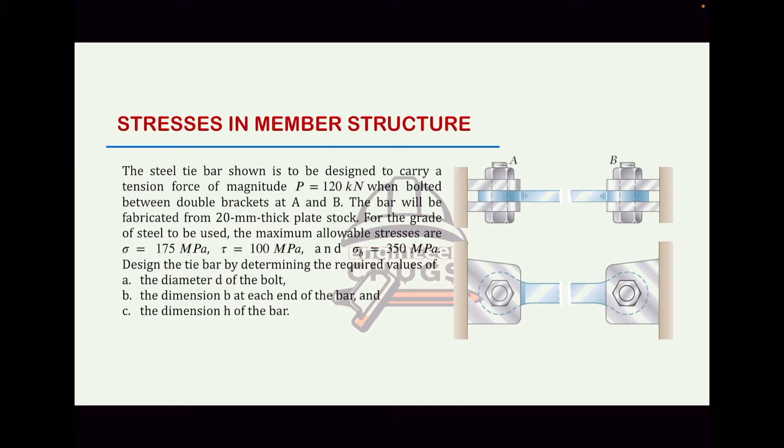Okay, so we have here an example. The steel tie bar shown is to be designed to carry a tension force. So ano ba yung tie bar na yan? So yung tie bar is ito. Itong blue. That is a tie bar.

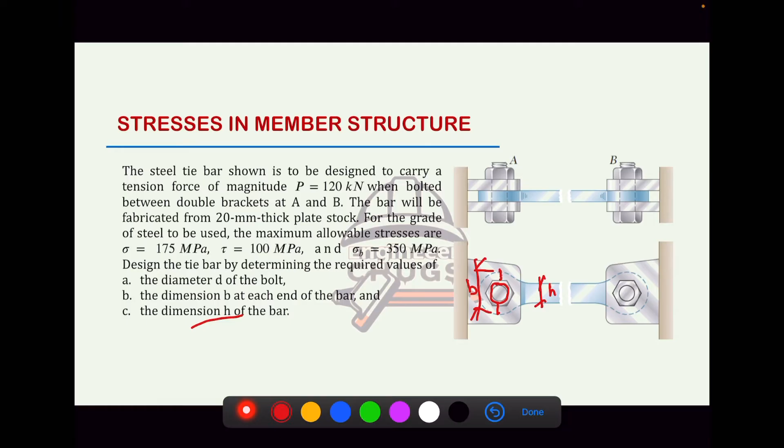Okay, so ganito. Meron tayong load dito. That is P. This is a double shear yung mangyayari dito, 'di ba? Double shear. So mahahati yung P. So ito yung P natin. Pero dito sa baba, this would be P over 2, para mabuo yung P.

Okay, so itong illustration na yan, what is happening there? Kasi double shear, kailangan yung P natin i-divide natin sa 2. That is 60 kilonewton. Ganito yung naging itsura niya. Ito yung bolt natin. Hindi pa natin alam kung ilan yung diameter niya. So meron tayong F1. Tapos ito yung P. Yung F1 natin, that is 60 kilonewton. Paghatian ito kasi double shear.

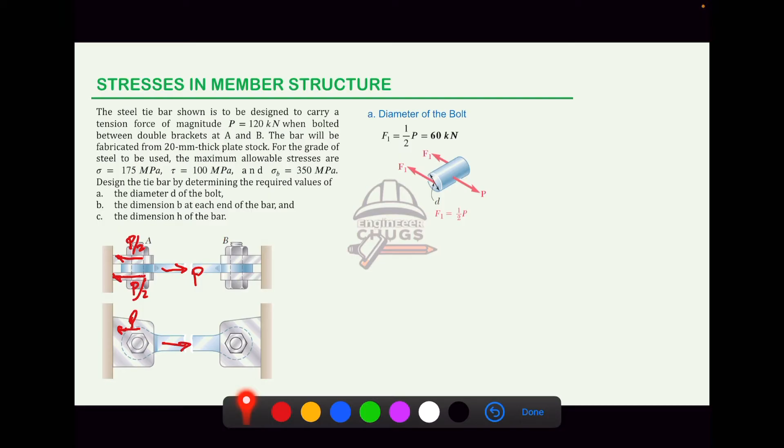Okay, so what is the formula for the shearing stress? That is F1 over the area. So yung F1 natin is 60 kilonewton and then the area is 1/4 pi d squared. Wala pa tayong value ng d, yun yung hinahanap natin. Given naman tayo ng allowable stress na 100 megapascal. So 100 megapascal is equal to 60 kilonewton over the area of the bolt. So mahahanap natin yung value ni d.

Okay, so kung isosolve mo lang to by your calculator, baka maling answer yung makuha mo. Kasi dapat magkaroon kayo ng consistency ng unit. Ito kasi megapascal, tapos ito kilonewton. So gawan mo muna ng paraan na maging convenient yung unit mo. Okay, so the answer is 27.6 mm. Yung pag-convert dito, kayo nang bahala dyan. Dapat alam mo na yan.

Diba? Malaki ka na. Charot.